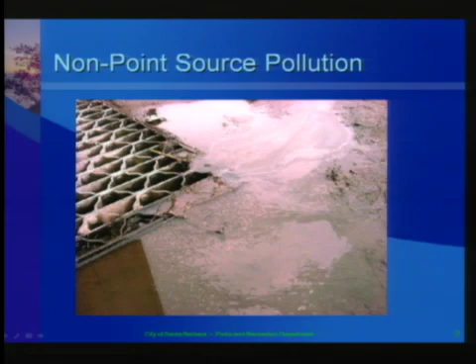As most of you know, the number one source of surface water contamination in the city of Santa Barbara is non-point source pollution, or stormwater and urban runoff that carries hydrocarbons, bacteria, metals, nutrients, and sediment into the creeks and ocean untreated. And what many people don't know is that the city is regulated for all of that stormwater discharge.

So everything that runs off of the city and into the creeks and ocean is regulated under the Federal Clean Water Act. The city is required to have a permit to have a storm drain system that discharges into the creeks and the ocean. Our regulators are the State Water Resources Control Board and the Regional Water Quality Board.

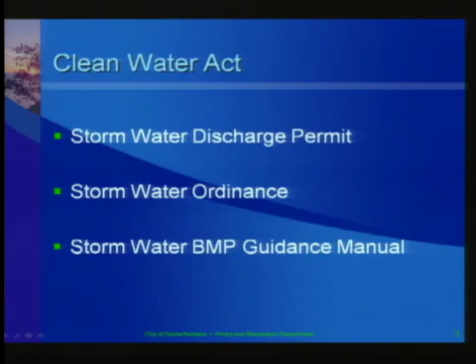And as part of that permit, the city is required to develop and adopt and implement a stormwater ordinance, and we've done that, and that is part of the municipal code, and it includes standards for stormwater runoff discharge from private and public properties for all development and redevelopment that takes place in the city. The city's also developed a stormwater best management practice guidance manual that has a lot of different tools that private property owners and public builders can implement to meet the water quality standards.

Our project objectives with these water quality projects are first of all, to do a demonstration project. The Creeks Division isn't really in the business of redoing all of the infrastructure throughout the city, but we wanted to do some demonstration projects on how these water quality friendly projects could be built in large public areas, in sort of the ubiquitous urban infrastructure we have, parking lots, streets, alleys, and so forth.

The projects are all designed to improve stormwater quality. These are permeable paver projects. So what happens when we have that stormwater runoff is it runs right through the surface of the permeable pavers into the soil below, where it can infiltrate and microbes in the soil can provide treatment for those pollutants. The projects are all designed to comply with the standards in the city's stormwater ordinance as well as in our state permit and with the Clean Water Act. And then lastly, there are incidental benefits to groundwater recharge and also for localized flooding in the project areas.

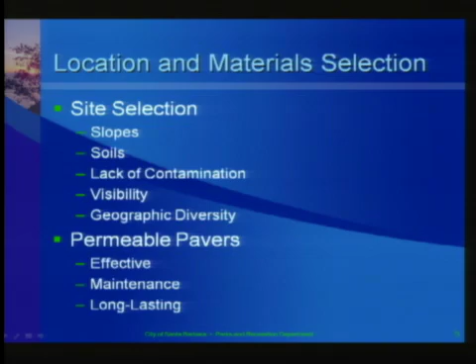We chose to use permeable pavers as compared to other types of BMPs for these, because they're very effective. If any of you have seen any of these projects in action when we've, for example, brought a water truck out, or you've seen them during a storm, they can handle a lot of water and it just passes right through the surface. They don't create any runoff. They also have minimal maintenance, and you can maintain them to maintain your permeability easily.

So, for example, as compared to permeable concrete that is poured in place, when that permeable concrete gets clogged, you have no way to backflush that system. You get the fines in there, and then you've got a clog. Whereas with the pavers, we can clean out the joints, and if it really became very, very clogged, you take the paver out, you clean the fines out, and you can put the pavers back in place. And then they're very long-lasting. These are concrete pavers. They'll have a lifespan equivalent to poured concrete, which should be 70-plus years.

And now I'm going to turn it over to Tim Burgess to give you some of the details about the project.

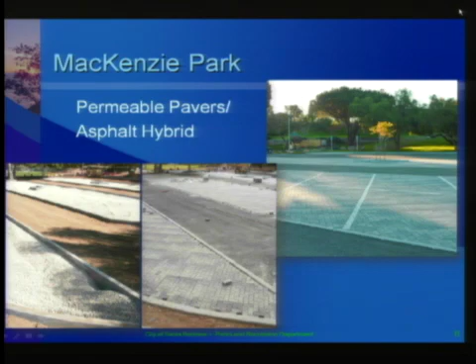In 2011, the city constructed the MacKenzie Park Stormwater Infiltration Project, and this project was designed to direct all of the runoff from the 35,000 square foot lot into these permeable paver basins. And a hybrid design was used here, where the parking spaces were where the basins were, and the driving portions of the parking lot were asphalt. And this was in an attempt to reduce upfront capital costs. This does, however, increase ongoing maintenance costs associated with maintaining asphalt.

In 2013, the city received a grant from the State Water Resources Control Board to pay for 80% of a stormwater infiltration project. The city selected 6 sites to install permeable pavers, and the approach that was done here was an all-paver design, no asphalt hybrid.

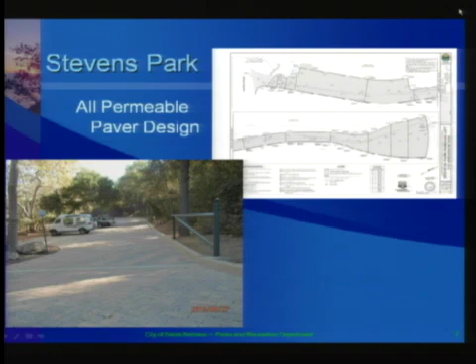What this does is eliminate the need to excavate so deeply, because you're not collecting runoff from another area, and you don't have to have an extra large basin to handle that runoff. It also eliminates the ongoing asphalt maintenance, and you get the benefit of the durability of permeable concrete pavers for the entire life of the project.

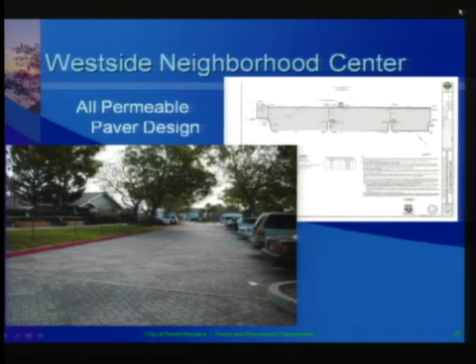This was done at Stevens Park parking lot at Canon Drive, the Westside Neighborhood Center parking lot at West Victoria Street and Euclid Avenue, the Oak Park Tennis Court parking lot on Tallant Road, and the Oak Park main area, which includes, these are the plans up here, the horseshoe pits, the parking lot, the stage area, and the picnic grounds over here.

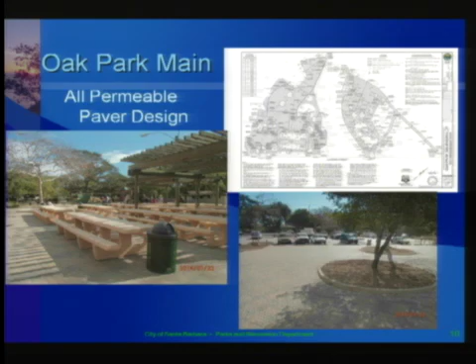In all, including all these projects, over 135,000 square feet of runoff has basically been eliminated and now infiltrates into the ground. These projects were built on public facilities, and they're built to handle large loads from fire trucks, tree trimming trucks, commercial trucks, and even, as in the case of MacKenzie Park during Fiesta, the large tractor trailers that bring in the rides.

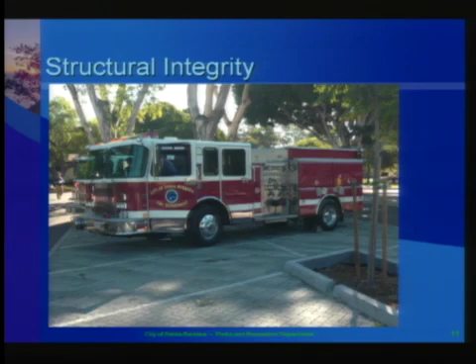You have the pavers on top, and the gaps in between each paver, where the rainfall can come through. Here is a layer of the base material, the rock, and it doesn't have any sand in between it, so it has a void space to percolate that water through, and also provide storage in the event that the rainfall rate exceeds the infiltration rate. It's temporary storage to give the water time to infiltrate into this subgrade. This is the native soil underneath.

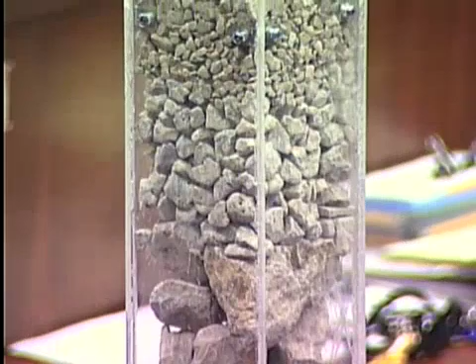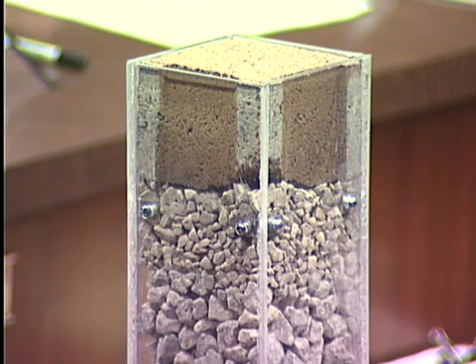To continue on with this model, once the water percolates through the rock, you've got this level subgrade. The water spreads out and pools up, and doesn't create any runoff by moving around underneath there. As Cameron mentioned, if you have a site that is slightly sloped on the surface, you can lower your costs by not excavating so deep on the uphill side and creating a terraced subgrade. The subgrade is up here, and then it drops down to here. These terraces are separated by concrete edge restraints, and they essentially create basins, as shallow as can be designed for the loading they take.

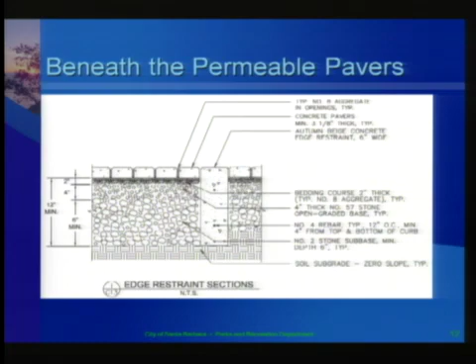These designs were all done by our engineering division, but they got a lot of the basis and information from the Interlocking Concrete Pavement Institute. This is a nonprofit organization that has a lot of information on concrete pavers and permeable concrete pavers. They provide example guidelines, specifications, and a lot of case studies, so it's really worth checking out when doing a project like this.

Before our project began, as specified by the ICPI and also by our technical guidance manual, we did pre-construction site assessment, where we analyzed the soil for soil type and contamination, groundwater depth to make sure it was deep enough, and then also infiltration rates. And we tested those infiltration rates.

And all of the infiltration rates, as Cameron mentioned, varied throughout the site, and even in cases where the soil map showed that it shouldn't be possible to infiltrate, or it's really tight C soils there, we found the soils handled the infiltration fine. And this was validated during this last storm event that we had a couple of weeks ago.

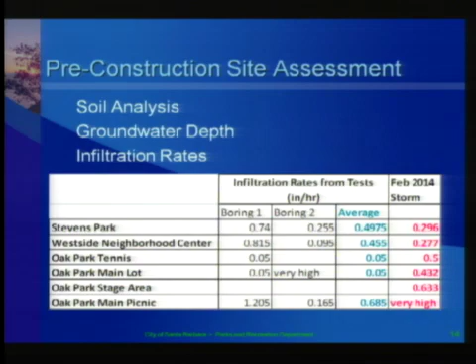We put in monitoring wells in these projects, and they're wells that go down from the surface to the subgrade. It's a perforated PVC pipe, and we can open up a cap and see what the water level is inside these basins. So as it fills up with rain, you can see what the level of the water is underneath there. And we use water level loggers that log the data, and then we download it.

And basically on the far right, those numbers are very similar to what we had tested on the site initially. And so this is the kind of chart that we get out of that test. I'll just briefly go through this. First of all, this is about Thursday to Monday morning. This red line is the rainfall accumulation over that storm, and on the right here is the inches of rain. So we got between 5 and 6 inches for that whole entire rainstorm.

And the blue line is the height of the water inside these basins. You can see when the rainfall rate was not as heavy, it was infiltrating all the way, and then as it intensified, the basin started to fill up, and it got to, say, 1.5, 2 inches here, up to 3 inches here. Keep in mind the total basin depth is 15 inches on all of these basins. So they handled all of the water that was rained on them. And so this is the Oak Park stage.

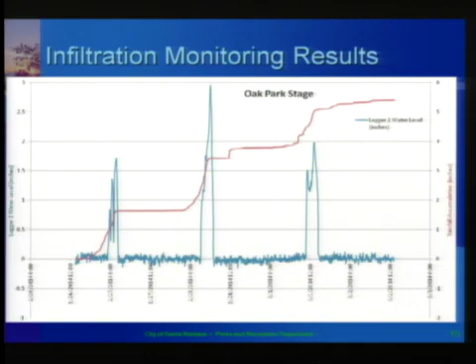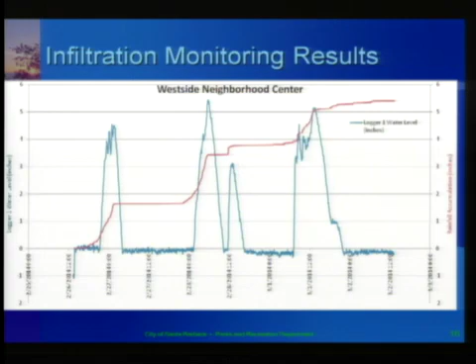Another graph. We did this for all the sites, but Westside Neighborhood Center actually takes runoff from the roof of the center and the walkways, so you get a little more runoff, and so you see higher water levels inside there. So it's 4.5 up to 6 inches at the Westside Neighborhood Center. Did this for all the sites. All of the rainfall that fell during that big storm was infiltrated.

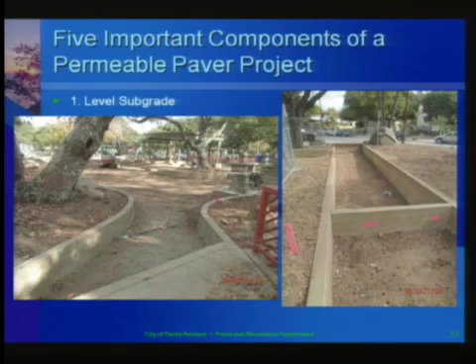And so the take home for these projects is 5 real important components. The first thing is having a level subgrade on a project of this size. You don't want that water moving around underneath and potentially eroding subgrade soils. And it also provides maximum infiltration by utilizing higher infiltration areas where the rainfall pools up. And it's all constrained by these edge restraints in these basins. And on the right here, you can see how it's terraced.

And another thing is, as I mentioned before, open graded crushed aggregate base. What that means is crushed aggregate is angular. So it's angular rocks, so they lock together really well in the absence of sand, because they don't have sand in between them. And it creates a void space to hold that water.

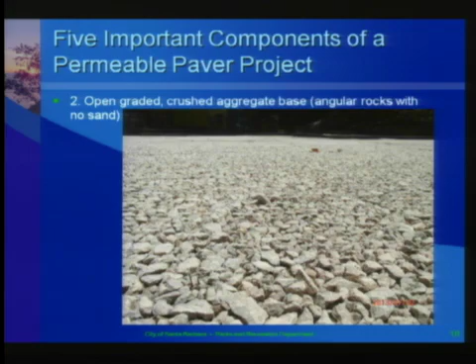And the compaction for this type of base is different from standard road base because it has to be done in layers. It has to be compacted in 6-inch layers. It's done with a vibratory 10-ton roller and on the edges a plate compactor. And we hired an outside contractor to test the compaction rates before we moved on to each additional lift to ensure that we don't get any sagging on these projects later on.

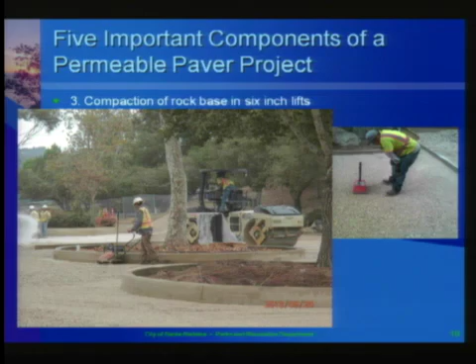Another important thing is to secure the utilities underneath there to prevent damage to them when you're compacting and also prevent any leaks from your basins into them. So this is a sewer lateral at Stevens Park. We covered this with a 2-sack slurry to keep the rocks from breaking that pipe. And at the end of the project, we did a pressure test on that pipe to make sure that it wasn't compromised.

And then this is a storm drain box at the Westside Neighborhood Center, a 2-part box. It's sealed on the inside, but before we put that second layer on, we put a mastic, a type of caulk, on here on the inside and the outside to ensure that the water doesn't leak through there.

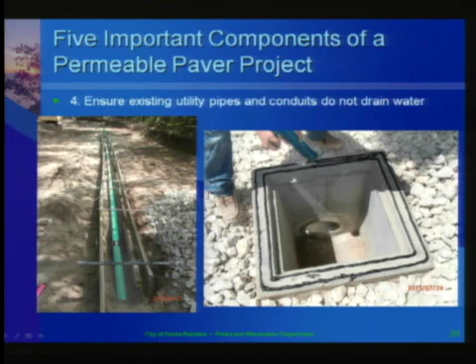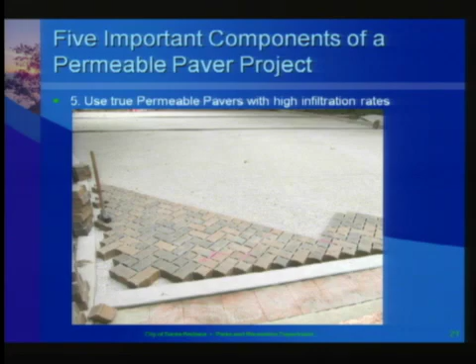And the last thing is to use true permeable pavers that have a high infiltration rate themselves, so the water can pass through easily. These have gaps in between them so that water can go through. Like Cameron mentioned with the water truck, a tremendous amount of water gets infiltrated quickly. If these gaps get clogged with a little bit of debris, you still have a high infiltration rate because you start with such a high infiltration rate to begin with. And one of the concrete pavers is right up there. And I'll turn it back to Cameron to conclude.

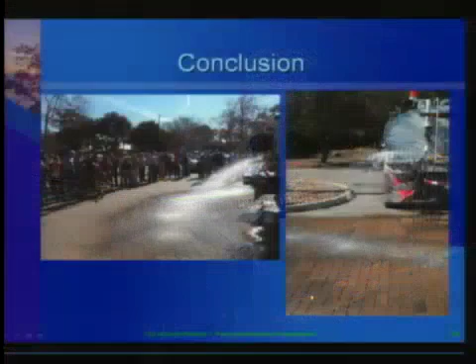Thank you so much. Well, gosh, this project and the implementation has been so timely with our extreme drought conditions. So I'll bring it back to the commission for maybe questions and comments at the same time, only because this is such an informational item for us today. Who would like to start? Mr. Campanella? Thank you, Madam Chair, and thank you for the presentation.

I visited the site when you did your demonstration out at Oak Park, along with Commissioner Schwartz, and I think it was pretty amazing the way that water got picked up and didn't splash or run off or anything. It was just an amazing sight. A question, and I'm going to defer to Commissioner Bartlett a little bit too, who's designing projects at this time, is I believe as of March 1st, projects within California, your requirement is not only to detain water runoff, but also to retain it on sort of a permanent basis. The rules are getting stricter in that regard.

So some of the solutions that are being looked at in new projects now could be very expensive, either the mechanical way that you do it or how you capture it, as well as utilization of land. So since we're in a primarily urban environment and you're redeveloping, I think the ability to do pavers on your surface parking maybe saves a lot of money, both in infrastructure costs plus also in land cost. And when it's appropriate, I'd like Commissioner Bartlett's comment on that as well, because he's designing projects.

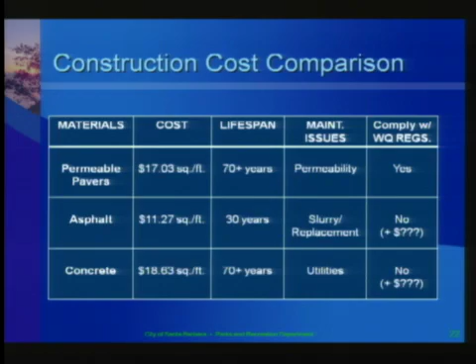Well, for example, there are other ways that you could comply. You could surround a parking lot with a vegetated swale that captures your water and drops it in. If we were to do that at Mackenzie Park, I think Mackenzie Park has about 75 parking spots. If we were to need to put a swale in around the entire perimeter of that, we would have had to shrink the parking lot. We might have lost a dozen of those, 15, 20% of the parking spaces.

But there are other methods in place, but they can be pricey. You can treat your water in a flow-through proprietary treatment system, and so you can capture all your storm water into a drain and then run it through a filtered system. Those can be very, very expensive to maintain.

We were just looking at a large development project in the city that was looking at one of those, and we were looking at annual maintenance costs between $15,000 and $20,000 for sediment removal and buying the filter pieces put in. I think the proponent or the applicants in that case are now looking at pavers as a way to, for less cost, and certainly less cost going forward, we have a better system available.

I see. Then to the other urban hardscapes that you have on your next steps list, I'm curious if the 3 projects that you mentioned, are they $2.3 million, and that's part of the new Prop 84 grant that you've just applied for that would cover all 3 of those projects? Mm-hmm. I'm sorry. Yes, that's correct.

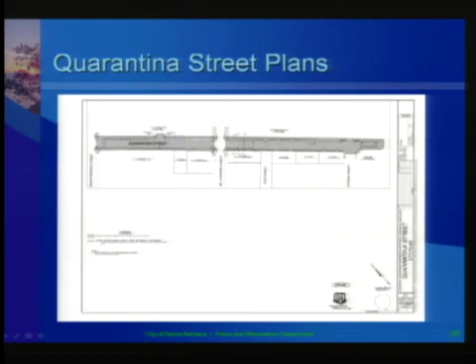One thing to point out, I did throw some of the plans on here. I don't want to get into a lot of the detail, but one of the things that's really interesting, and I wish I could have blown this up better, but this is the 2 blocks of Quarantina Street. So you have Ortega down here and Canon Perdido here and De La Guerra running through. One of the issues that we're having here is we have large Italian stone pines, probably 80-plus years old, along this block of the street.

We think this is going to ultimately be much, much better for these large, mature street trees, but also because you won't have cars driving on the roots, you'll have any kind of water, including just incidental urban runoff from irrigation overspray coming in and watering the trees for us. But we'll also save on street repair from these kinds of things.

So we're trying to come up with a design that will reduce that maintenance, protect the trees, and also provide aesthetic benefits and water quality benefits. And there's an avoidable cost that should go on our spreadsheet, so to speak, our overarching cost spreadsheet in terms of the cost-benefit analysis to moving in this direction.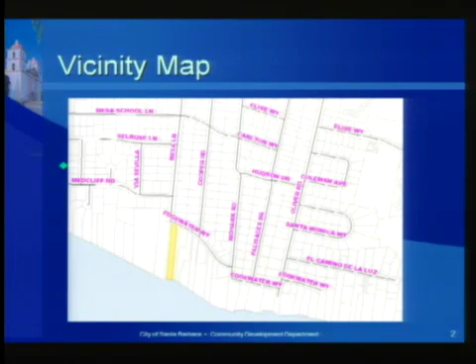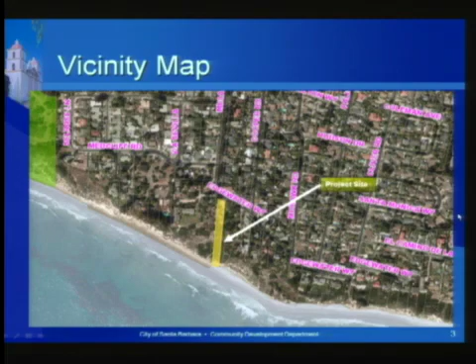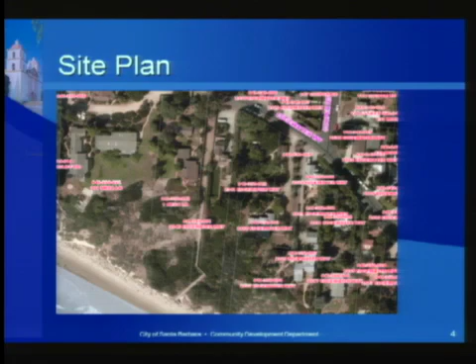Yes, good afternoon, Commissioners. Kelly Broadison with Community Development. And as you said, the project I'm presenting today is a two-story house at 2345 Edgewater Way. The project site is on the Mesa, and it's at the very end of Mesa Lane. It's right at the corner of Mesa Lane and Edgewater Way, and it's right adjacent to Mesa Lane steps. The project site is in the E3 single-family residence zone and the SD3 appealable jurisdiction of the coastal zone, as well as the Hillside Design District.

The 25,000 square foot bluff top lot is currently developed with a 2,100 square foot two-story residence. You can see here I'm showing a slide of the existing residence and the garage in the front. The applicant is proposing the demolition of the existing residence and construction of a two-story, 2,400 square foot single-family residence and a 420 square foot two-car garage.

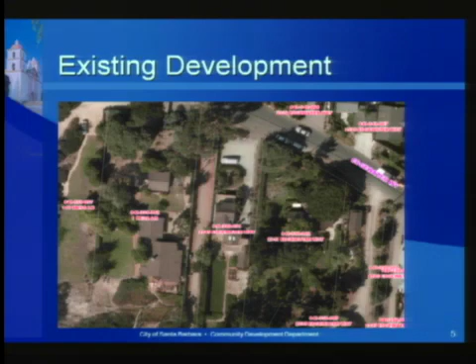The first floor will be about 1,900 square feet, including the garage, and the second floor will be about 877 square feet. And the required application for this project is a coastal development permit to allow the development in the appealable jurisdiction of the city's coastal zone.

And this proposed project is consistent with the regulations of the E3 zone regarding building height, setbacks, solar access, open yard requirements, and parking. Here I'm showing a site plan of the existing footprint. I tried to outline here the property lines and the footprint of the building, as I said, and the pink line here is the bluff top that is being recommended by the geologist.

The project was reviewed for consistency with the local coastal plan. The project site is currently developed, as I said, with a single-family residence, and it's situated on an elevated marine terrace southeast of Mesa Lane. The southern portion of the property includes the sea bluff and beach area to the south. The LCP states that new development on the bluff top shall be placed at such a distance away from the edge of the cliff that normal rates of erosion and cliff material loss will not affect the structure during its expected lifetime.

A preliminary geology report was conducted for this project that describes the geology on site and the potential for landslides and erosion, and the estimated average rate of bluff retreat. The report states that there is evidence of a mature landslide on or near the subject property, and the site-specific average bluff rate of 3 inches per year with a project design life of 75 years results in a minimum geologic setback of 18.75 feet. However, due to the potential for landslide activity on the site, the geologist has recommended a more conservative setback of about 110 to 122 feet.

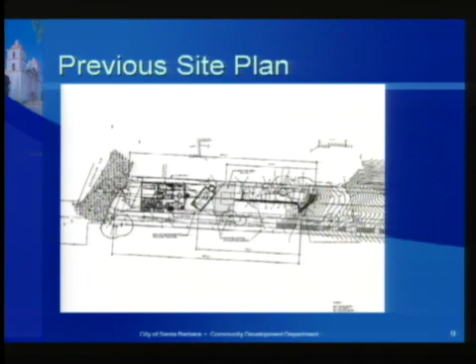So in the staff report, I also provided a summary of the design review comments. The project was first reviewed on September 9th, 2013, and several neighbors showed up at the meeting and opposed the proposed design. And although the board appreciated the original design, and here I'm showing a site plan of the first design and the pool behind, they requested that the applicant restudy several aspects of the proposal, including the tower element, which you can see here in this elevation.

Manipulating plate heights; they suggested a 7-foot plate height. Study methods to reduce the overall size and mass of the building as viewed from the public street, and lowering the height of the walls. Suggestions also included studying an increased setback from the street, recessing the second floor, and revising the entry design to the courtyard to be neighborhood friendly.

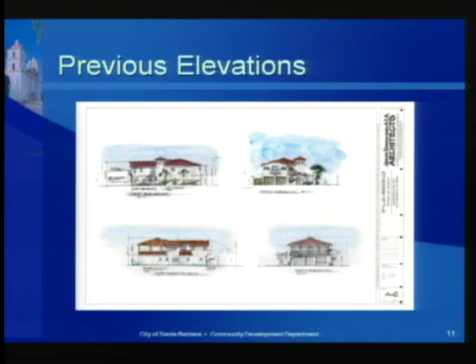Several neighbors spoke in support of the revised design, and the board found the revised architectural approach acceptable. This project will return to the full board for future design implementation, and any changes to the site can still be addressed at Single Family Design Board as it moves forward. Let's see.

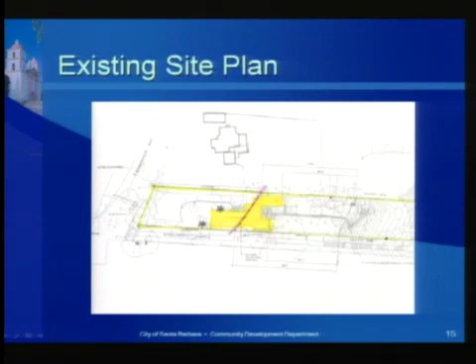LCP policies 2.1 and 2.4 serve to protect public access in coastal bluff areas. This project site is located immediately adjacent to the Mesa Lane steps, which provide the public with vertical access to the beach. And this new development will not inhibit the existing coastal access to or along the beach, and may actually make the entrance of Mesa Lane steps more visible to the public.

The project was also reviewed for visual resources, and LCP policy 9.1 serves to protect existing views to, from, and along the ocean. The Coastal Act states that new development must be sited and designed to protect views along the scenic coastal area and minimize alteration of natural landforms.

This new residence will be further away from the top of the bluff and closer to the street. Again, the Single Family Design Board has reviewed the proposed project and found that public views of the ocean would not be blocked. The project would remain visually compatible with the surrounding neighborhood and the character of the site. And the new residence is not likely to significantly impact public views to and from the ocean.

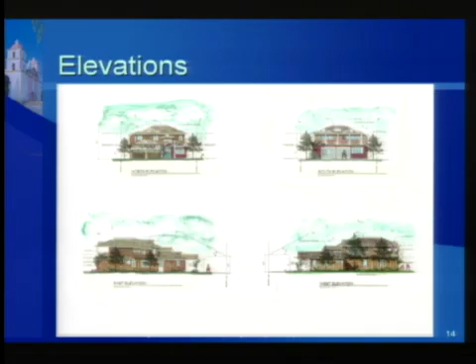Mr. Zimmerman, pull the microphone down a little bit. Oh. Just, that's, yes. Okay. Excellent. So what I did was the roof itself slopes up away from the property lines here and also there. And then from the front elevation, the roof slopes away from the property lines. And so, some houses that you see, there's a ridge coming out here. And the 25 feet actually happens at the property line. But in this case, the roof slopes away from the property lines, so you have less of an impact. That's very helpful. Thank you.

While you're there, I have one more question about the site plan for you. The proposed location of the pool equipment, I'm not sure if I could really read where it was on the site plans. It would be in the rear of the house, and we haven't located it as yet. We're thinking about recessing it so that it takes care of any noise or motor running. I'm sorry, recessing it. What does that mean? Well, we'd recess the equipment down into the ground. Underground? Yeah, more or less underground.

Between the house and the pool, is that what you're saying? Yeah, it'd be in that location. In that location? Yeah. Okay, thank you. So, Mr. Zimmerman, to Ms. Pujo's question, you don't have a preferred or proposed location that perhaps you could at least point to on another slide for us today? Because that may be a question that a number of us have.

So the pool equipment would be located about in here, right here. And that would be next to the walkway. So it'd be located about right there. It would not be in the setback. It'd be out of the setback. The pool and the spa you're referring to? Yes, both of those. Okay. Ms. Pujo, any additional questions?

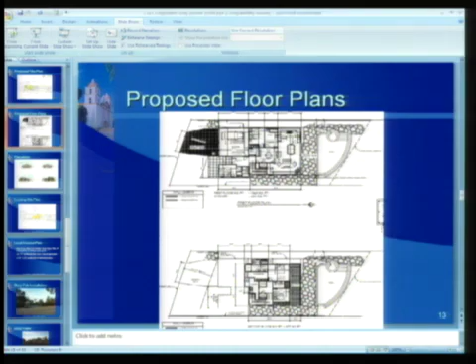I have one comment on the driveway in the front. Do you want to go to the landscape plan? Oh, well, Public Works has not asked for a concrete sidewalk. They asked for a walking surface so that it blends better with the neighborhood. I think that was noted in our site visit, correct, Ms. Broadison? Yes. Chair Schwartz, I just wanted to add the trash enclosure.

This project is here today at Planning Commission for local coastal plan for coastal development permit. And if there are some minor site design changes, maybe adjusting the building a little bit to make it more compatible to make the findings, or adding a trash enclosure, tweaking the design, that can be done at SFDB, so we can make that a condition of approval. So I just wanted to let you guys know that. Okay. Thank you, Ms. Broadison, for clarifying that. Mr. Bartlett, additional questions at this time?

Yes, I had a question again for the applicant. In looking at the landscape plan, it's indicating that the entire right-of-way beyond the property line abutting the street is, where did I see it here, decomposed granite, similar to that slide that we just saw previously for the permeable paver demonstration. And yet it defers to the architect's plan for further clarification, and then the architect's plan is silent. So I'm curious what you're really proposing in that zone in the right-of-way in front of your property.

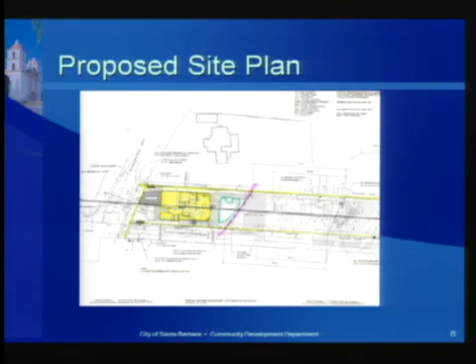Commissioner Bartlett, are you talking about where the sidewalk would be? Well, that's what I'm asking. Is it a sidewalk? Is it decomposed granite? Can you put up the landscape plan? Yeah. Public Works had asked for a walkable surface, so it could be interlocking pavers, or it could be more of a stepping stone feeling across the front. But it's just not going to be a concrete sidewalk.

Okay. And then that kind of leads to my question that I had posed, I think, at the site visit and to staff about the applicability of the pedestrian master plan, because in reading this, it pretty much says Santa Barbara pedestrian design guideline is issued by the city transportation engineer. Every project that is designed and built in the city of Santa Barbara should conform to these guidelines. And when you go to the 50-foot right-of-way width, it clearly calls out concrete curb with a parkway, with sidewalk and all of that.

So is there something that we got back from transportation specifying that it doesn't need to comply with this on this project? I know the last one we reviewed in the Bluff area of the Mesa, it was included in our package. The Planning Commission opted to not have it required on that case because there were no other sidewalks within about a 2-block radius. It would be the only patch. Where this one, we have sidewalks directly to the west, continuing from the path that goes down to the beach. So it does abut with other sidewalked conditions.

That's correct, Commissioner Bartlett, and I did clarify with Public Works staff just a moment ago. You'll recall several months ago there was a lot line adjustment project east of this site on Edgewater Way, where at that time Public Works was asking for curb, gutter, and sidewalk, and the Planning Commission opted to not require the sidewalk because there was not sidewalk on either side of it, for various reasons. They will be providing curb, gutter, and I believe a decomposed granite walkway to define the pedestrian space. And this site, there is sidewalk directly west of it. Well, I think most of Mesa Lane has sidewalk.